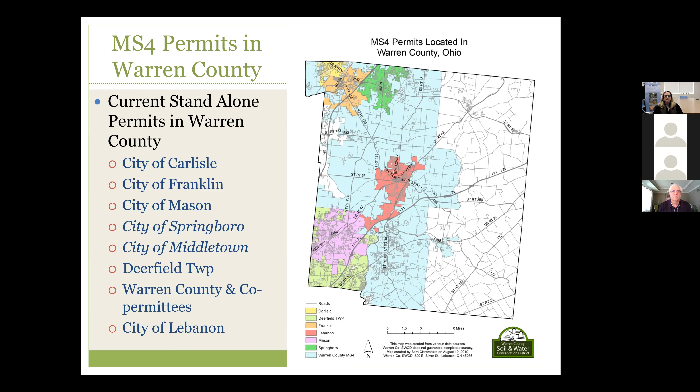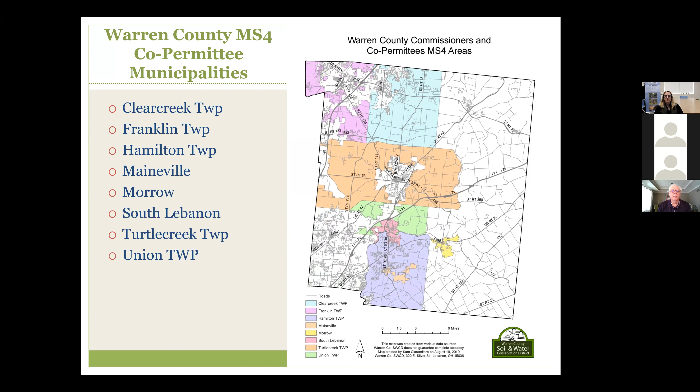So then just a reminder of who all our co-permittees are. So Clearcreek Township, Franklin Township, Hamilton Township, Maineville, Morrow, South Lebanon, Turtle Creek, and then Union. And we do all the MS4 work in those townships or municipalities here at the Soil and Water Conservation District and the engineer's office.

And then we do have working agreements where we provide the MS4 services with City of Mason and Deerfield Township, City of Lebanon, Franklin, and Municipality of Carlisle. So some of the things that we are working with them to do is we review the SWPPPs, perform monthly site inspections, and then we assist with enforcement needs. And then we also provide the earth disturbing permit through our office, which I will go into further detail on, I believe, in the next slide or two.

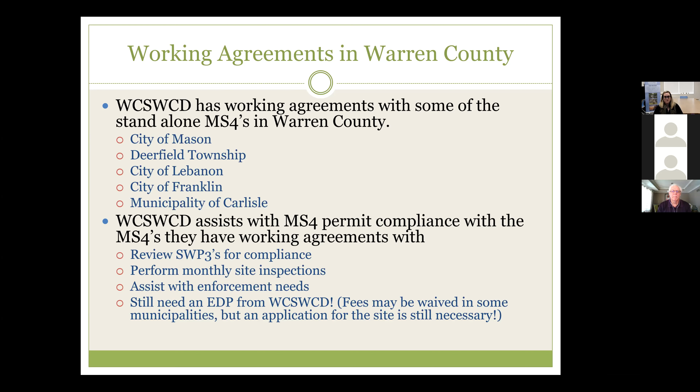So then this is just a quick slide. Most of you guys are pretty familiar with it, but just a reminder of how to obtain an earth disturbing permit in the county.

Submit full construction plans and a SWP3 to us, and then also the engineer's office or whatever local municipality that you plan on working in. You want to submit your SCM operation and maintenance documents to the municipality engineer, and that's what we're really going to focus on the rest of the presentation.

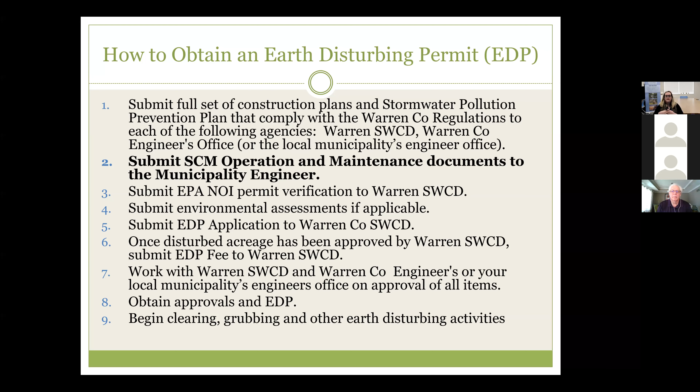Show us your Ohio EPA NOI verification, any environmental assessments that were done on the site, if applicable. We do have an earth disturbing permit application. It's a little one-pager that you can find on our website. Then your fee, if you're in an area that does require an earth disturbing permit fee. And then continue to work with us and whatever engineer or municipality you're in for approval on all items. Once everything's approved and accepted, then you can start the work.

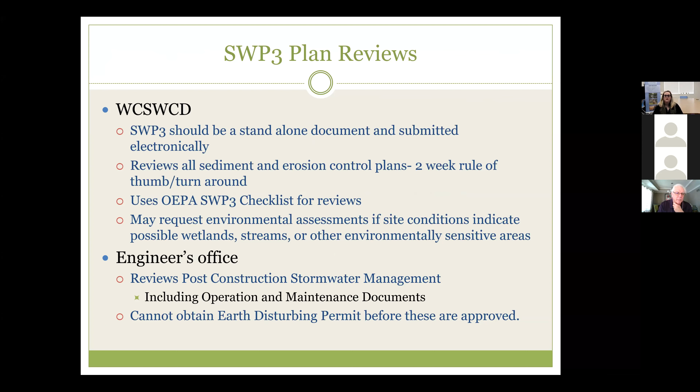So part of our plan reviews, just a standalone document. We try to do a 2-week turnaround that includes any and all communication. We do use the Ohio EPA SWP3 checklist, and then we may request environmental assessments. I try to do those at the forefront if I believe that there's some kind of environmentally sensitive area on the site. And then the engineer's office reviews post-construction stormwater management, and that includes the operation and maintenance documents we'll be discussing. And again, you can't obtain the permit until all of this is approved.

So just that reminder that with these operation and maintenance documents, it's not just how you're going to maintain them, but who's going to maintain them, and how the long-term operations and maintenance is going to be set forth. And similar language is reflected in the Ohio EPA general construction permit. So a maintenance plan should be provided by the permittee for post-construction operation of the site.

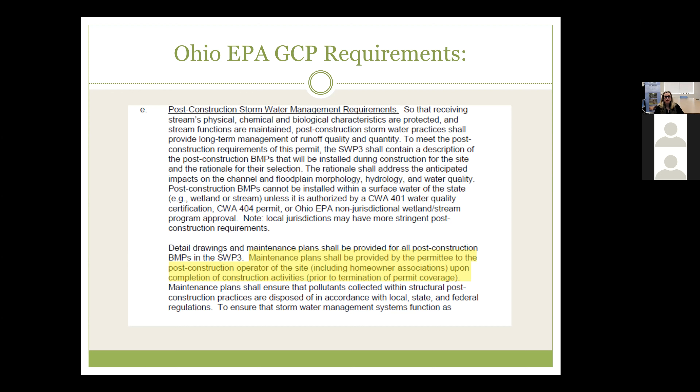This section, I used to have the page memorized, but it's got good information about what all should be in these operation and maintenance documents. And the next page is extended. So just a reminder, any necessary legally binding maintenance easements and agreements need to be included in these operation and maintenance documents.

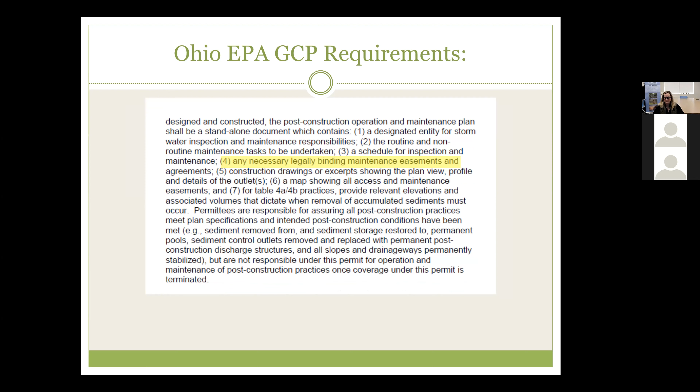And probably should have put this in sooner, but we are improving our language and acronyms here at the county. I mentioned this in my urban update newsletter that went out earlier this month. When it comes to these post-construction stormwater measures, we're trying to call them SCM. So that's your basins, proprietary devices, bioretention, instead of just calling them BMPs, because BMPs is such a broad term that encompasses so many things. So we want to be more specific and call them stormwater control measures. A lot of other municipalities are starting to call them this. So Warren County's getting, I guess, hip with the times and stormwater language, and trying to refer to these post-construction controls more as SCMs than BMPs.

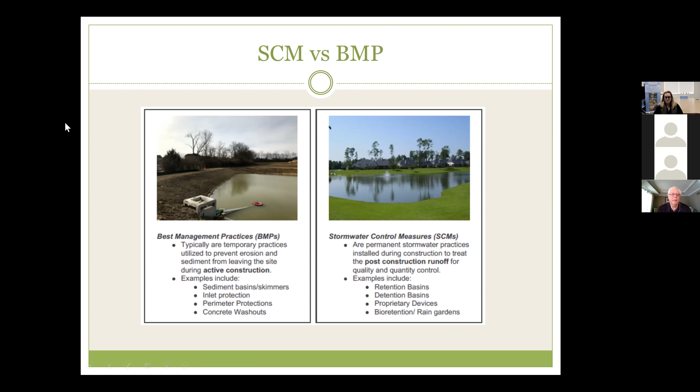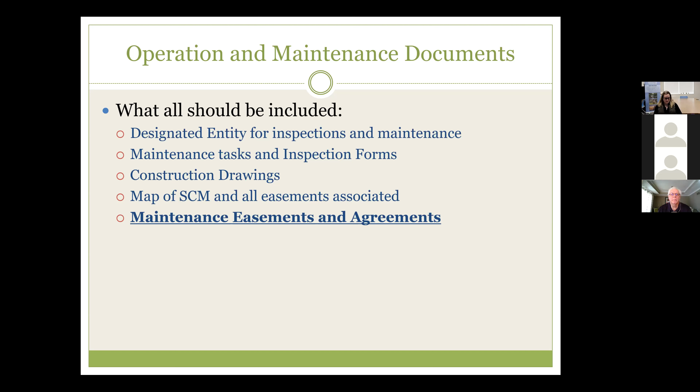Next slide. All right, so now I'm going to go over what all should be included in the operation and maintenance documents, going over the different bulletins that are laid out in the general construction permit. These will all be submitted to and approved by the engineer's office. Typically Chuck will take all this information in. I'm just going to go over what all needs to go in them here today, and Chuck will also chime in occasionally.

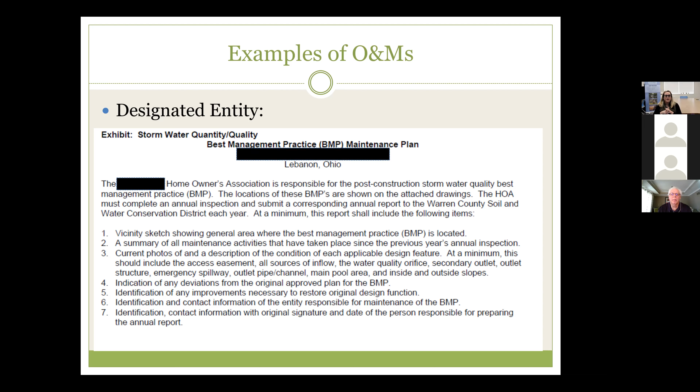And next part, you want maintenance tasks, so the things that need to be maintained and how often. It can be as simple as the schedule. Typically, you want the orifices checked, make sure that no debris is built up. I've seen some down in Nashville where trees grew right in the outlet structure and weren't allowing any water through, and it was supposed to be a dry one. So make sure that whoever takes the long-term responsibility knows what to check for, how often to inspect it, and how to maintain it.

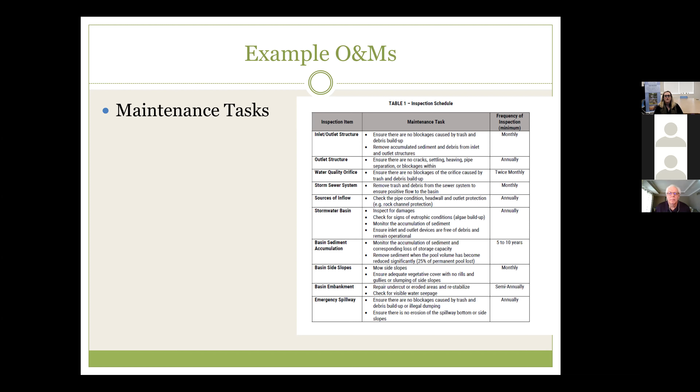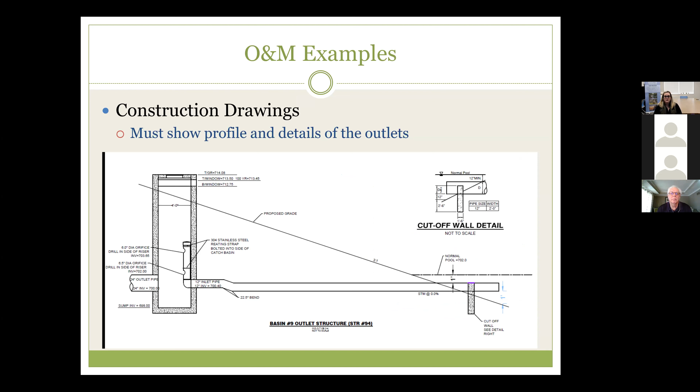Construction drawings, so just typical what the orifice and outfall structure should look like, the different elevations. Chuck can probably go into a little more depth if you guys have any questions on this later.

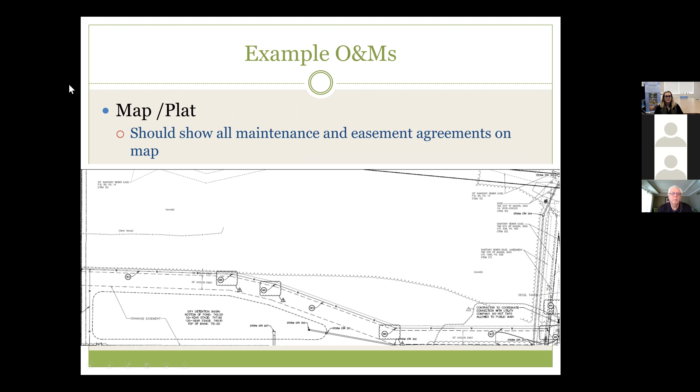And then a map or plat. So the map in these documents should also include any and all easements that are associated with the control measure. What else? Oh, yeah, so pretty much any easements, and then where exactly the measure is located on site, and any other important information that whoever takes care of these knows when they look at it.

And then easements and agreements. So one of the things that we will be requiring is that they be recorded along with the deed. Basically, we want whoever, sometime down the line, someone buys this property, that they know that these control measures are on site and that they are required to maintain them and inspect them on a regular basis. So that's just a snapshot from a draft plat, just kind of showing some of the responsibilities and making sure that those are being recorded.

And then that's it for my section. Chuck's going to go a little bit further into details about how to get these SCMs approved in our county when you're wrapping up construction and you want to be done with us bugging you and inspecting and everything's finishing up. So I will pull that up while Chuck gets ready to talk.

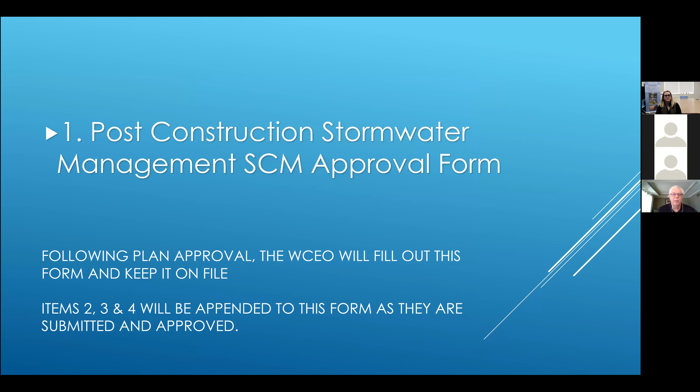So your O&M manual, once it's been approved by the Warren County Engineer's Office, you are going to record it at the Warren County Recorder's Office so that the O&M document is attached to the deed or made such that any future owner of the property will be aware of the O&M requirements. We'll go to the next one, please.

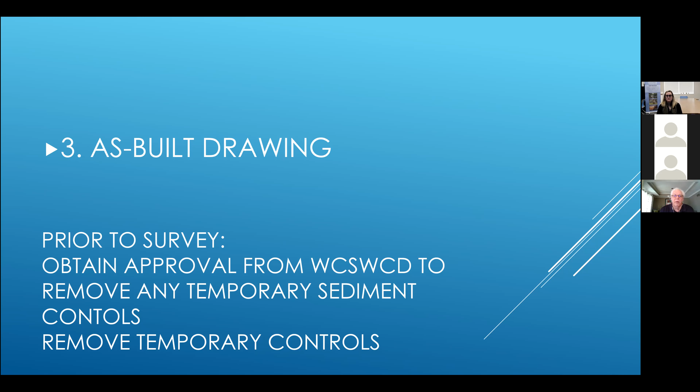So our as-built drawing is the same as it's always been for the past 17 years. Don't know if I was going to cover anything else. I think our next slide details what we need in the as-built drawings. Oh, one thing we did want to mention there is don't perform your as-built survey until the temporary sediment control measures have been removed. I've seen that happen somewhat recently, in that we get an as-built, go out and verify something and find out that the skimmer is still in place. So that has to be removed. And before you remove it, Beth has to approve its removal.

So our record plan information requirements here are part of our old regulations and have now been incorporated into our stormwater design manual, which is going to pop up on our website and perhaps Soil and Water's website in the near future. But the information we're looking for is the size and elevation of all the orifices, the length and elevation of all the weir crests, and a stage storage table that contains elevations at 1 foot increments and the area of each elevation and the volume at each elevation.